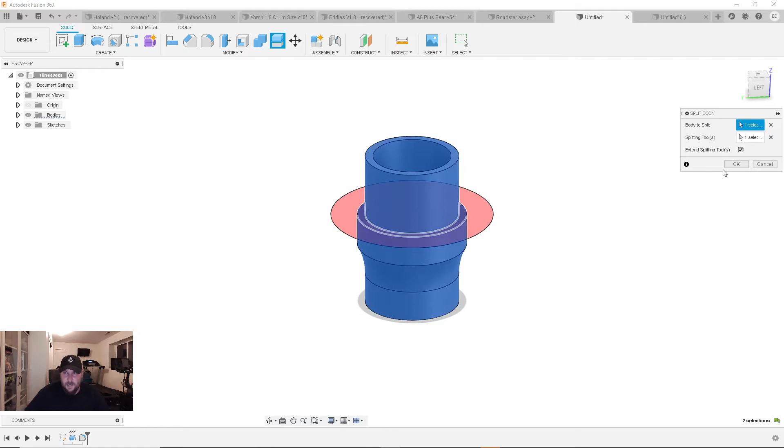Let's take a look at a couple scenarios here. First one we're going to do is make basically a pipe joint. Right now we've got this particular single body that we want to cut into two pipes, but we don't want to just cut it on this plane right here, because we want this pipe to go down into the body down here like a slide joint, like you could find on maybe an exhaust pipe or some plumbing pipe. So instead of doing this plane cut, we are going to cut this body all the way down to here, basically digging it out of the other body.

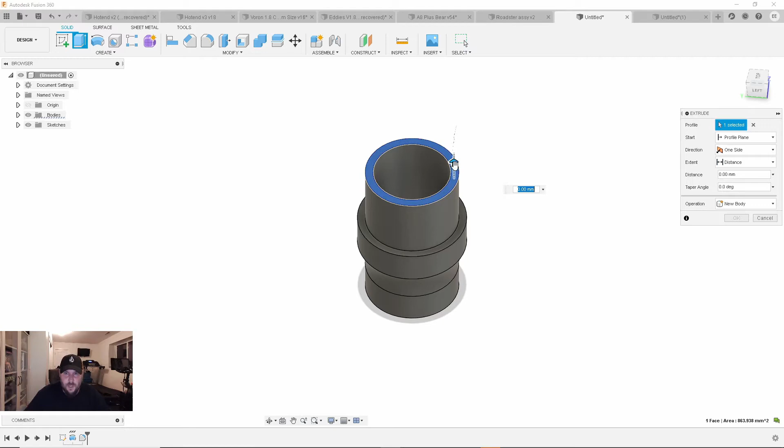The way we're going to do that is we're going to create a second body to split the first body with. So in this case, what we're going to do is highlight this face, hit E for extrude, and drag this all the way down here. Let's call it right there. But instead of cutting, we're going to create a new body and hit OK.

At this point, it doesn't look like much has changed. If you look down in the middle, you can see the seam where that second body comes in. Let's go over here and expand our bodies. There's the new body we created. Turn that off, turn the old body on. Nothing has changed on this body. We have this new body that perfectly matches the geometry of this one.

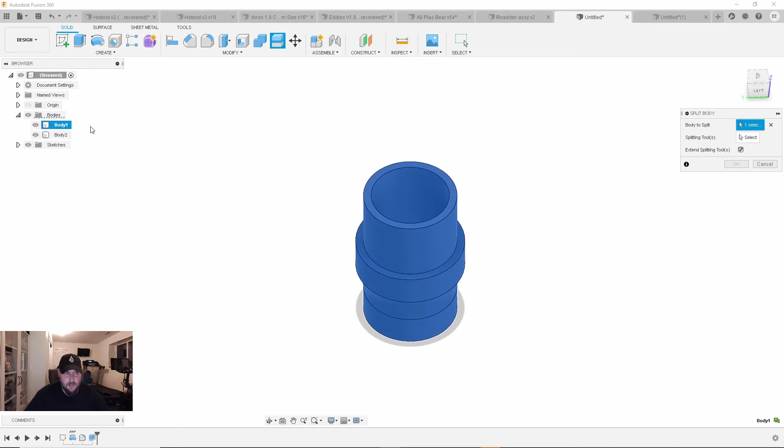So what we're going to do is say split body. For this body to split, we're going to choose the first body. In the splitting tool, we're going to choose the second body. You notice it actually shows you what it's going to cut here. And we're going to hit OK.

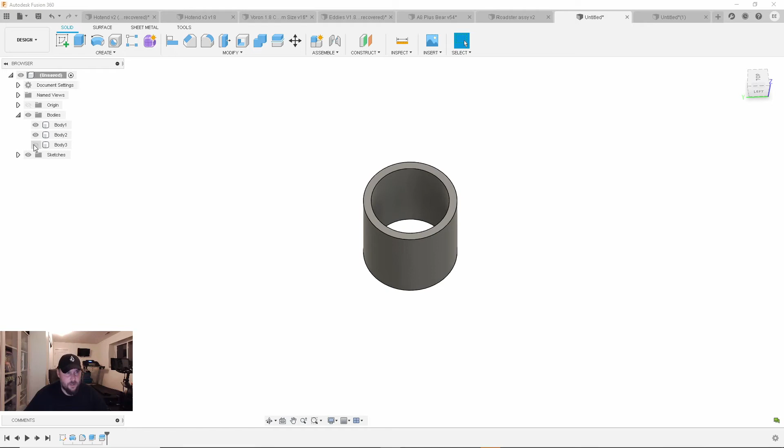Now over here, you see we have three bodies. These two bodies here are identical. Now, this is a pretty simple demonstration, so we could have just used that second body to begin with, but if we were making a more complex geometry, wanting to take a chunk out of something, that would have been very useful. But regardless, we now can just turn off one of these bodies, and we have two separate bodies here. If I right click and move this, we have got a nice little joint that we can make there.

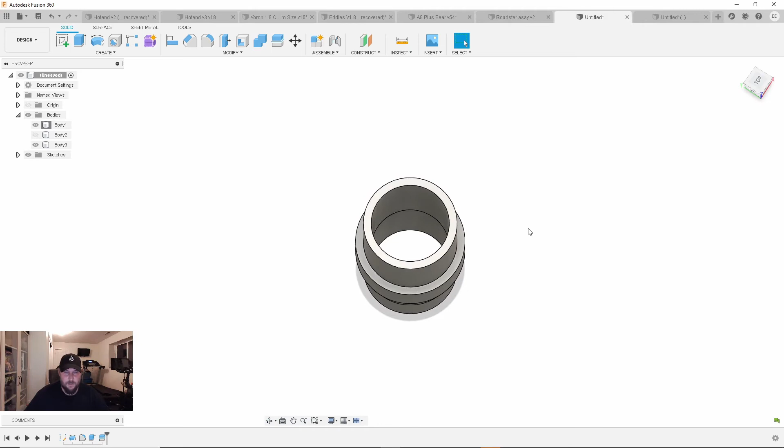So that's a pretty straightforward example - a real quick, real easy way to get more than just a plane cut on a body.

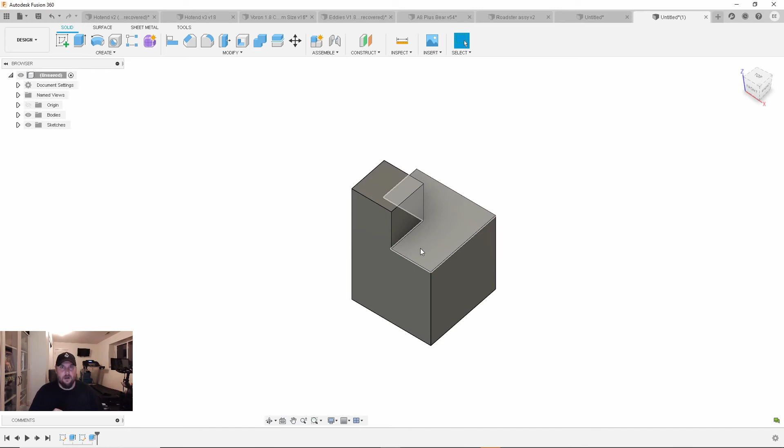Second example I'm going to show you is a little more complex, out of a much more basic shape. Not so much of a real world example, but what we're going to do here is take it one step further, and split this body similar to the way we did before, only we're going to add an extra feature, a registration mark in it. So when we say 3D print this or cut this or mill this, when it slides together, it's going to have a registration mark in there to actually help these pieces be assembled after we create them. So let's do what we did before.

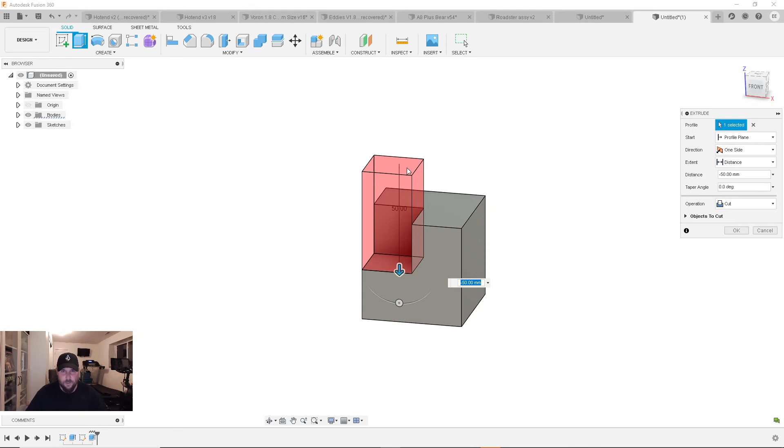We're going to do an extrude. I'm going to bring this down, call it 50 millimeters. It's a 50 by 50 by 50 box with a little 25 by 25 nugget shooting out of it there. We're going to make a 50 millimeter post. We're going to make another new body, hit OK. So like before, we have our initial body and this new body that we've created.

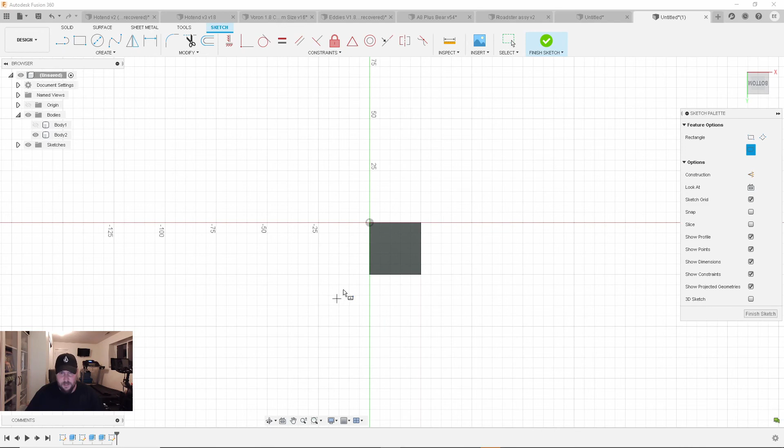But what we're going to do here is, on the bottom of this, we are going to create a sketch, do a quick little rectangle. We're going to do a center rectangle, just call it 5 by 5. And we're going to extrude this out 5 millimeters. So now we've got this extra little nugget in there.

Go ahead and turn this body back on. When we do our split body, we're going to choose our body to split. Then we're going to select the other body to cut, or split I should say, and hit OK. So now...

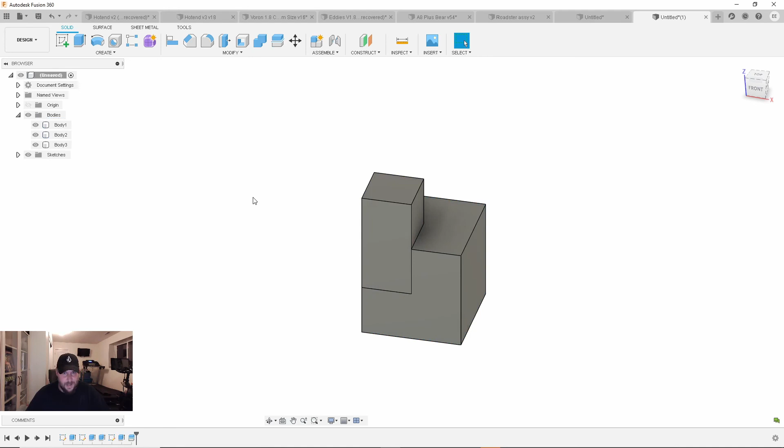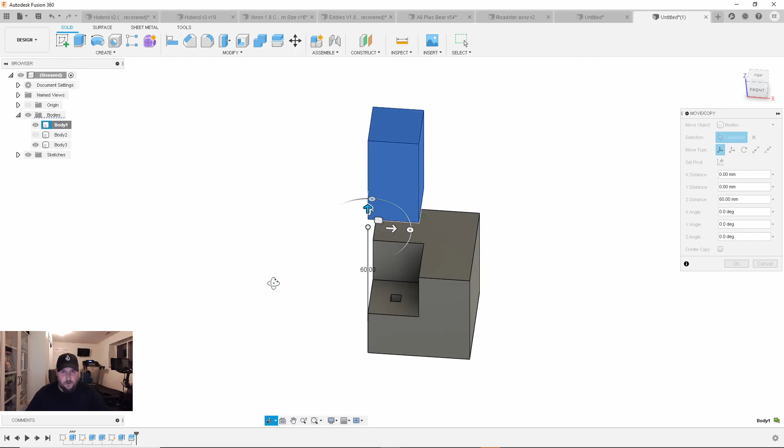When we take a look at these, not only do we split the body on that line that we created, we now have a registration mark for assembly. So if I move this up, when we go to print, mill, create, cut, whatever this, we can create it with this registration point in there. Not only did we cut the body, we added some features as well.

So you can do this with some pretty creative geometry. One of the things I was doing here was just using the existing features of the body to create a new body. You could create an entirely separate body with completely unique geometry and place that inside of another body to cut or split that body. The cutting and splitting tool at that point works just the same. But if you need to take a very complex bit of geometry out of another body, this is a great way to do it.